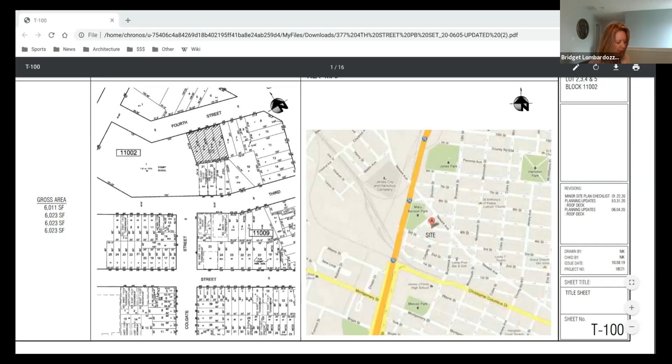Lewis, you slow down please. Yes ma'am, repeat that again. You can see Montgomery Street is down at the bottom here.

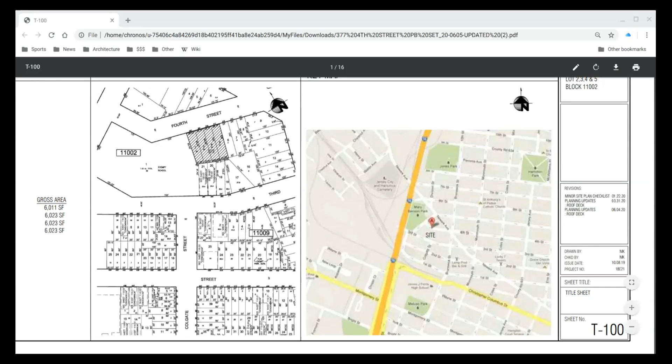So we have Montgomery Street going across the bottom, and a little above that, Columbus Drive. Then on an angle going right past our site, we have Newark Avenue. We see 4th Street here, a one-way street going west, and we are on a single block of 4th Street on the west side of Newark Ave. Looking to the left, you can see the tax map. Newark Avenue is going across the top, and here's our little block of 4th Street. The 4 shaded blocks here are ours, 100 foot wide, 100 foot deep, tapering down to about 92 feet deep. Next to us is this huge property, the 4-story school. On the other side, we have mostly 3-story and 2-story buildings, and across the street we have 4-story and 2-story buildings. So that's just to give us an idea of where we're talking about.

So we are proposing a new 4-story, 20-unit building, and I'm going to go right to the site plans and walk you through a little of what we're doing. You can see the bulk of the building. I should note this is a window well on the left here, and we're providing that for the building to the left - there are 2 windows that we need to provide light for.

Our rear yard is 30 feet. Most of that area is a lawn available to all the tenants, and part of it is also paving. Chuck had mentioned the setback to the school - you can see it here. This is the closest point the school is to our building, and it's 10 feet. So we took that 10-foot line and ran straight from there, and that gives us our side setback on this side.

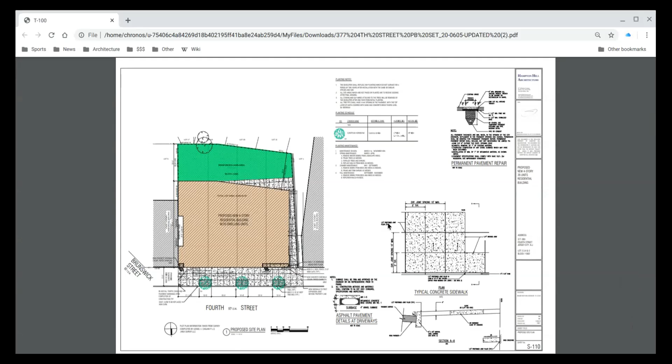Additionally, at the front of the property, you can see we're proposing 3 new street trees, as well as proposing a new sidewalk and new curbing. And with that, I'm going to move on to the floor plans and walk through them.

So here on the ground floor plan, you can see to the left we have 1 stair into the building by that window well. To the right we have our main lobby with elevator, 2 stairs, and a hallway down the middle. Our first floor is elevated, stepped up a couple of feet. We are in a flood zone, so we're bringing it up to 1 foot above base flood elevation here.

Before I go to the apartments on the first floor, I'm going to briefly go to the basement, just below this laundry room, right below the building lobby. You can see it to the right here. The elevator and 1 stair go to the basement, and the basement has a trash room, a bicycle storage room, and utility space. Now back to the first floor.

We have 3 apartments on the back that are 1 bedroom, 1 bath apartments. These have an open dining kitchen area, with the kitchen having an open countertop for seating and eating. All the bedrooms have walk-in closets. We have central air conditioning and stackable washer dryers in all of these units, and of course they are all ADA adaptable. I'm bunching these 3 apartments together - they're all right around 720 square feet, and they're all the same all the way up on every floor of the building, so we don't have to go over it every time.

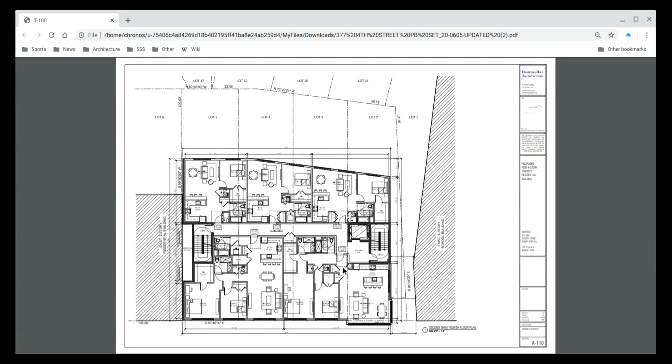Going to the roof, we are proposing a new roof deck. There is a calculation for what's allowed on a roof deck, and it's 30% of the roof space. That would allow us 1,842 square feet, but through our meetings, the community thought that was a very large roof deck, and we've shrunk that down to 1,250 square feet.

Both stairs go to this roof, the elevator goes to the roof, and we have a small elevator lobby at the roof level. We have planters that are buffering this roof deck, and then we're providing 1,838 square feet, about 30% of the roof, in green roof trays.

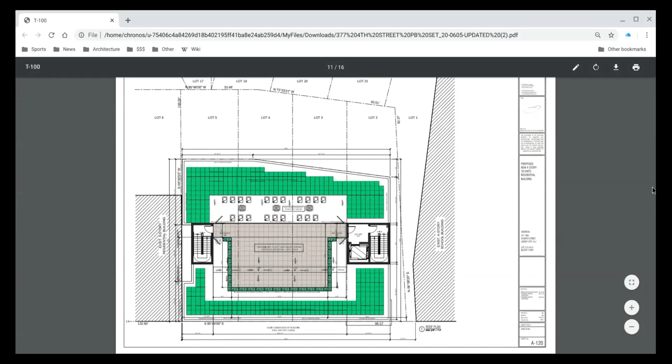Moving on, here are just some pictures of what the planters would look like. And looking at the front elevation, I'm going to zoom in a little bit on this one, just to get a better look.

As I said, we're proposing a 4-story building. The main bulk of the building has a first floor that is a gray cast stone base. The bottom base is a 48-inch tall block, and then above that we have 24-inch tall blocks.

The floors above that, floors 2, 3, and 4, you can see it's a red-gray brick finish, and this is going to be a smooth brick. We're doing brick soldier courses at every window header, and we're doing recessed bands every 8 courses for decoration.

At the top, you can see we have a pretty substantial cornice, 48 inches tall, and it will be a metal wrapped cornice painted black. Window frames and door frames are also black.

If you look to the right of the building, the section where we have the lobby, you can see we have a little bit of a more modern take on it, just to let it stand out a little bit. Besides the different finish, we're pushing and pulling a little bit here.

At the top, these 3 floors are cantilevered out about 18 inches, not too far. We're using a metal panel finish with the same windows as we have everywhere else. The windows are actually just closer together, so they look a little bigger.

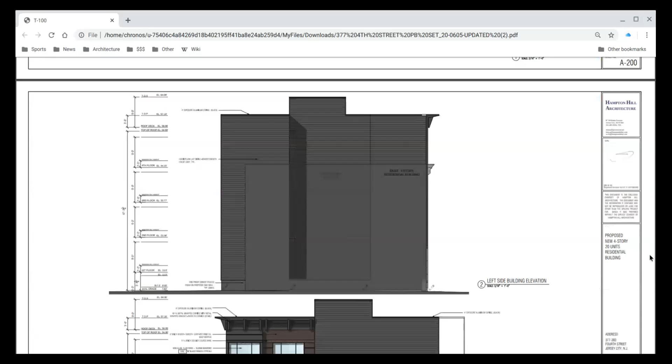Looking at the side elevation, I'm going to bring us back to full size here. The one thing I want to note on the right side, this is the side of the building with the lobby on it and the school. We're actually wrapping that around, and we're coming back to the stair tower, which is about 25 feet. So those finishes will wrap around the side.

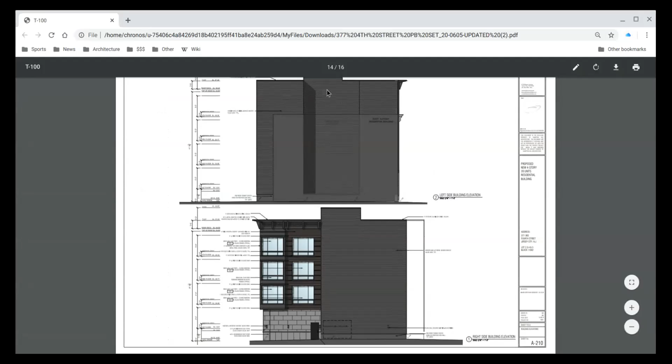Other than that, we're proposing a HardiePlank finish on the side, on the other side where we're not next to the building and in the window well. And lastly, on the rear of the building is also going to be HardiePlank. That is the end of the architectural presentation.

I think maybe we just move on to Charles and take everything together. Is that what you'd like to do?

Well Jeff, while you're testifying now, you had an opportunity to review the planner's report from the city, correct? Yes. Okay, and it speaks to pilings or piles that would be used in connection with this project. Although it's a construction issue, could you give the board the benefit of your thoughts on what needs to be done here?

Sure, and unfortunately, I didn't get to read that report before I went to the meeting, when we had the meeting with the community, so I was hopeful maybe we could reduce the number of piles, but the soil here is some of the worst soil I've probably ever read about.

Basically, the first 10 feet are really bad fill, then the 20 feet below that are organic fill that's not suitable for soil bearing. The report mentions this used to be some sort of a stream, basically eons of river deposits which are completely unsuitable. The 20 feet below that are mostly unsuitable for soil bearing as well. So the report thinks we're going to have to go down probably a minimum of 45 to 50 feet for all of our piles.

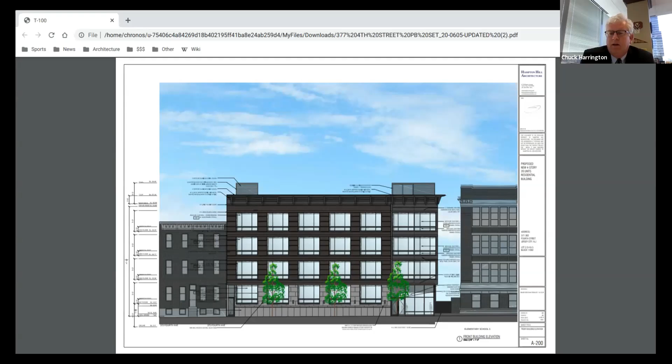Right. In truth, I'm not testifying to anything that wasn't testified last time you heard this case, because the soil engineer did testify at the last one. Right, this board heard ad nauseam all about the soft soils in this area and the different piling systems, so that was not something we needed to present tonight. Okay, understood, I just didn't want to force too many questions on this topic. Got it.

Okay, then I'll move right on to Mr. Height to address the requested variances.